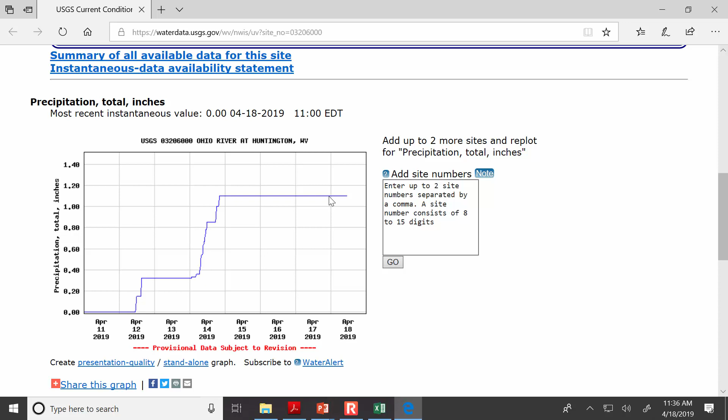The river depth here is regulated by a series of locks and dams on the Ohio River. It would be very unusual in an unregulated stream to have periods where there's just a totally flat horizontal line like this. But it's possible in Huntington at the Ohio River that the water depth could stay the same.

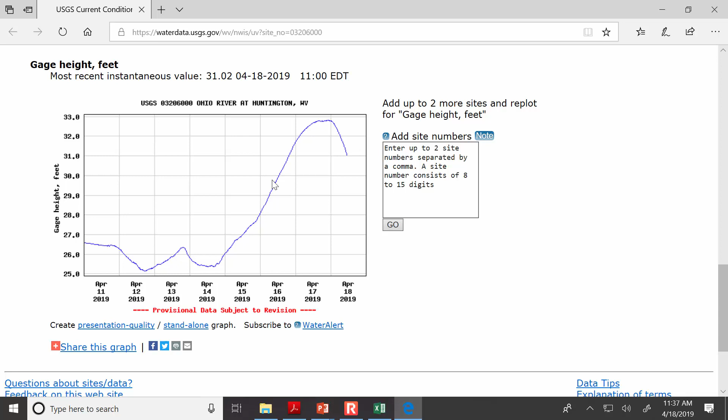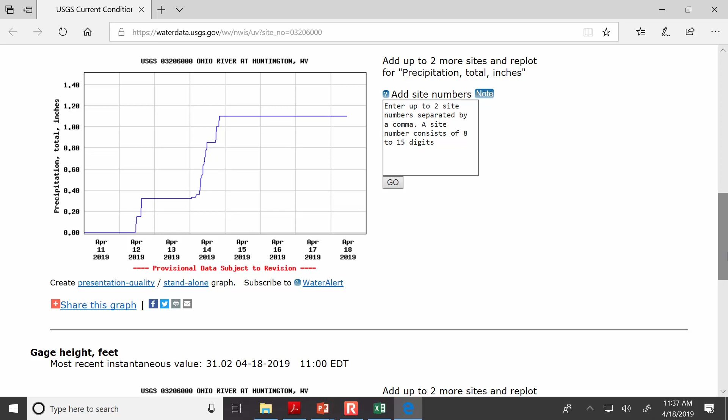Oh, this is precipitation - what am I talking about? Here's the depth. It is still a regulated stream, and you'll see times where the pool doesn't seem to be changing very much. But if we look at the relationship between when it's rained - here would be precipitation total over the past week - it rained on the 14th. So if we go back here and look, the depth on the 14th was 26, and then the depth increased. So as you might guess, there's a relationship between when it rains and when the river depth increases.

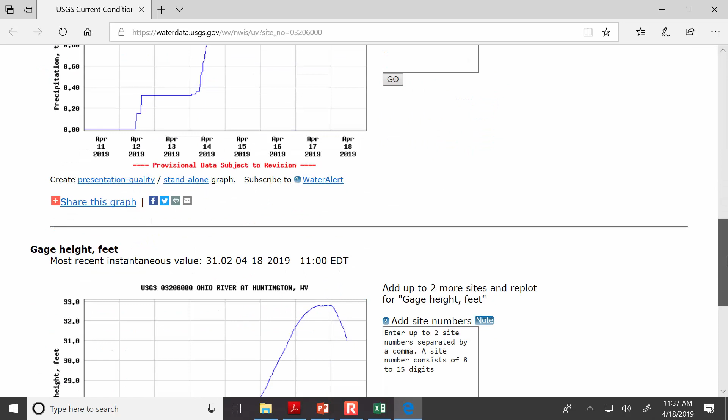If you think about how important water is in West Virginia and the number of stream crossings where there's a road going across a creek with a culvert underneath or a bridge, there are literally tens of thousands of spots in the state where there's a bridge or culvert, but yet there's only 100 stations where they're directly gauging the stream depth.

I mention that because it illustrates the need for some method to extrapolate from a measured depth to what the depth will be upstream or downstream of the spot where you're actually measuring. For instance, if we're measuring the Ohio River at Huntington, what does that say about the river depth at Green Bottom? We don't have a gauge there, but you can estimate the depth upstream using methods incorporated into HEC-RAS, a program developed by the Army Corps of Engineers.

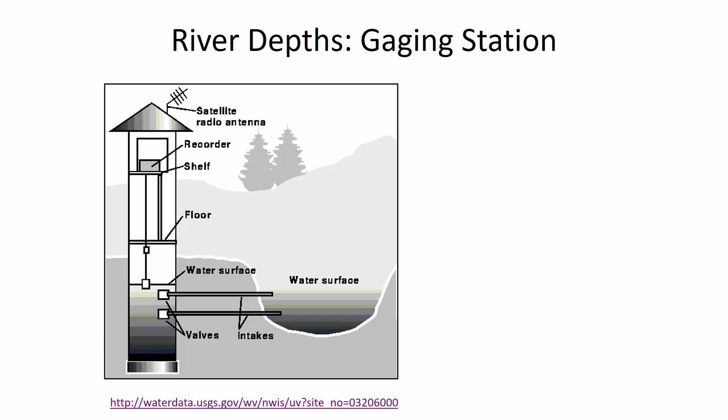What we're going to learn today and on Tuesday is the method working behind the scenes in these hydraulic calculators. You'll learn how to do the calculations manually by hand on the spreadsheet, because you should never really start using and trusting a design program until you have a firm grasp on what math it's doing, what the limitations are when it doesn't apply, or what assumptions it's making.

The direct step method, in some texts also known as the step-by-step method, answers the question: if you have two depths, how far apart are they? It's used in cases of non-uniform flow, and remember there's a variety of features that can cause non-uniform flow. If water is approaching a drop-off, then there's a curved surface of the water.

In the recorded lecture you watched for Tuesday, you learned how to find the slope at just a single point, the slope of the water surface. But what's a little tricky is you can't use that water surface slope to find the depth upstream and downstream directly, because the slope is changing.

We can say the rate of change at a single location, but the problem is if you move upstream, you're going to have a different slope. So we have to have some method that accounts for not only the changing depth but the changing slope as well. This direct step method is used in non-uniform flow where you have steady conditions, meaning you assume the flow rate is constant over time, but non-uniform means it's changing with respect to position because of a hydraulic feature like a change in slope, a spillway, a gate, or flow over an edge.

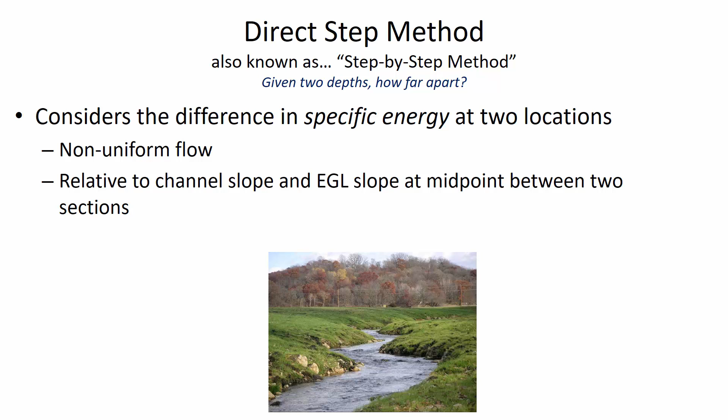The calculations we'll do look at the midpoint between two sections. So we'll divide a curve up into pieces, and then we're going to basically numerically integrate based on what's happening at the midpoint between two pieces.

The direct step method, here's a summary. This water surface cross-section shows y1 as the upstream depth and y2 as the downstream depth. Because you have non-uniform flow, the slope of the energy grade line, labeled TEL for total energy line, isn't necessarily the same as the water surface slope, and that's not necessarily the same as the channel slope. So those three aren't parallel like they would be in uniform flow when we use Manning's equation.

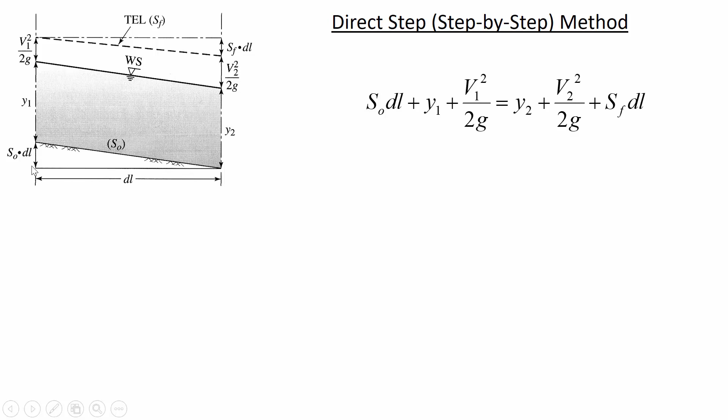Here is what we are adding up: all of the components of energy. On the left side, S naught times dl is how far above some datum the channel is—that's the slope of the riverbed bottom, S naught, times dl, the distance between the downstream and upstream sections. These two sections are a certain distance apart, the channel is sloped, so Z1 is going to be higher than Z2. That's the first element of height at location 1, then there's the depth Y1, and then we've got the velocity head. Those are the three terms that account for energy at location 1.

As the water flows downstream, look at the slight subtle differences on the right side. At location 2, we measure the elevation relative to that location, so the datum is at the bottom of the channel. Now we don't have any term related to the slope or how far upstream—we're just measuring the energy and depth starting at location 2. So the terms are the water flow depth, the velocity head, and the energy loss.

So S sub F, remember the slope of the energy grade line is related to the resistance that the water encounters as it's flowing downstream. And if we have uniform flow, if Manning's equation applies, then S naught times dl would be equal to S sub F dl. So in uniform flow, if they were parallel, the delta Z is the same as the H sub F. But that's not the case here because we don't have uniform flow, since the depths are different, Y1 and Y2. So this energy loss isn't the same thing as the delta Z.

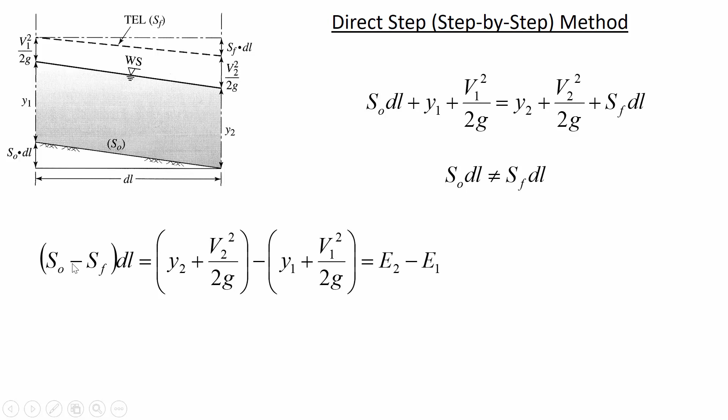Now, what we're going to be doing is taking a look at the characteristics of what's happening in the middle between the two points. Because remember, the whole issue here, we're trying to predict how much deeper or shallower the depth is upstream. We'll have some point where the depth is known, and then we're going to try and find out what is the depth somewhere else. So we're starting with a location where we know the depth, and trying to see how much deeper or shallower it is somewhere else.

So what we're going to do is divide it up into lots of little pieces, and we're going to ask ourselves, how curved is the water shape between those two points? We're going to analyze the curvature of the water shape, and that will tell us the distance in that segment.

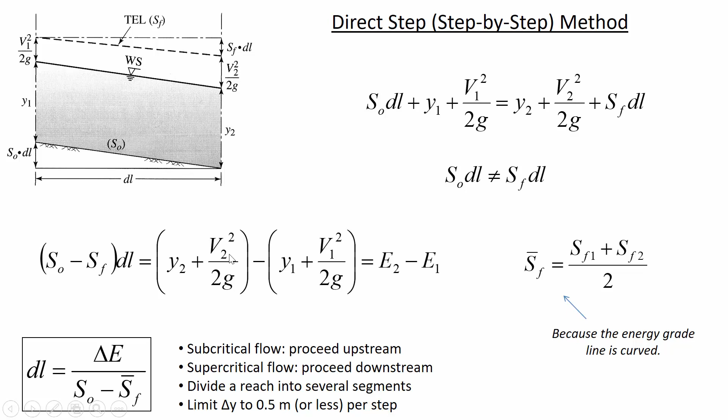So the dl, the distance between the two points, is related to how much energy loss there is relative to the difference in slopes between the channel slope and the average slope of the water, the energy grade line. This bar here, S bar, just means consider the energy grade line at the upstream and downstream location and average them together.

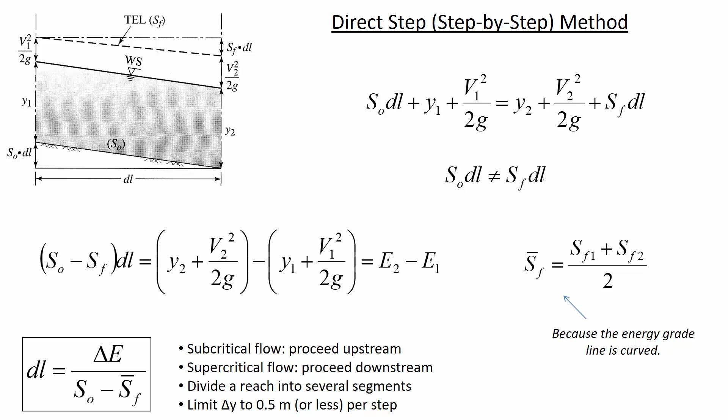This method seems pretty abstract until you actually have to apply it, and I think one of the best ways for me to systematize a process and a series of equations like this is to come up with a spreadsheet example that illustrates it. So that's what we're going to do today, and if you have your computer with you, you're welcome to start up Excel and follow along. If you don't, that's fine. This will be recorded, and you can watch and absorb, then work through the example later. Either one will be fine.

So while your computer's booting up, let's take a look at what's happening here. Why is there gradually varying flow? We have water flowing downstream, and originally it was flowing at the normal depth. So way upstream here, we could have found the depth upstream because we know the N value, we know the width of the channel, we know the channel slope, the flow rate. So all of the things that we need to use Manning's equation are provided. And we could find, if we go far, far away from this disturbance, what's the uniform flow depth. But as the water gets closer and closer to this obstruction, why is the water getting deeper? Why does the water pool upstream of an obstruction?

Very good, exactly right. It pools because it's gathering enough energy to get over the obstacle. So upstream, it wasn't yet affected by that obstacle, so it was just flowing at its normal depth, the normal depth being where there's equilibrium between energy loss and the downstream slope. So in the normal depth region, the flow depth is just governed by the slope of the energy grade line being equal to the channel slope. But then we get into this section where it's under the influence of the obstruction, so what we're able to measure is the depth immediately upstream of this broad-crested weir.

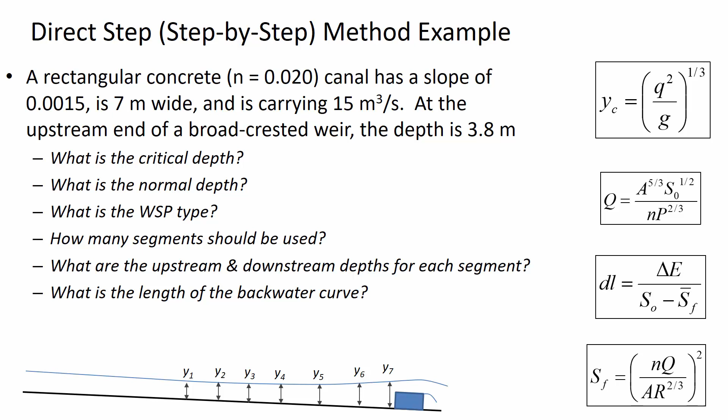These first two parameters we have to calculate are critical and normal depth. If the normal depth is greater than the critical depth, that means it's mild, so normally you'd have subcritical flow. But if the normal depth is less than the critical depth, that tells you you have a steep slope and conditions are going to be supercritical. We'll do this preliminary work on the whiteboard and take a look at whether conditions are supercritical or subcritical.

And just for the people following along at home, I will pull up the same thing on the screen.

We could really use another whiteboard in this classroom. You wouldn't believe how big the whiteboards were when we used the engineering lab building next door. Oh, they were vast. The good old days.

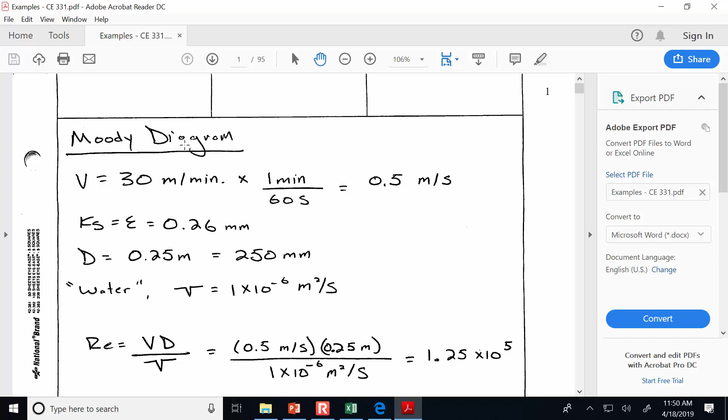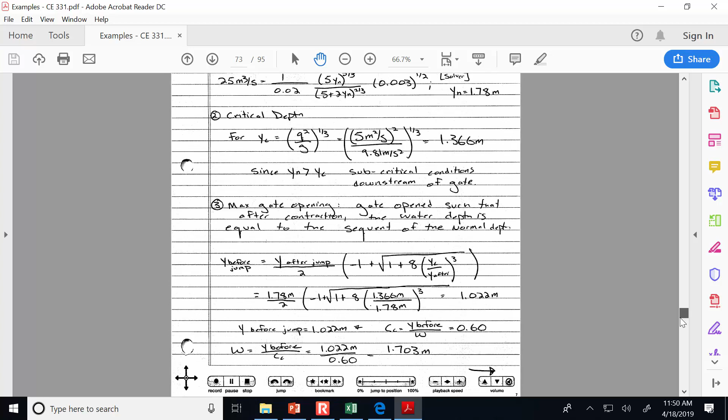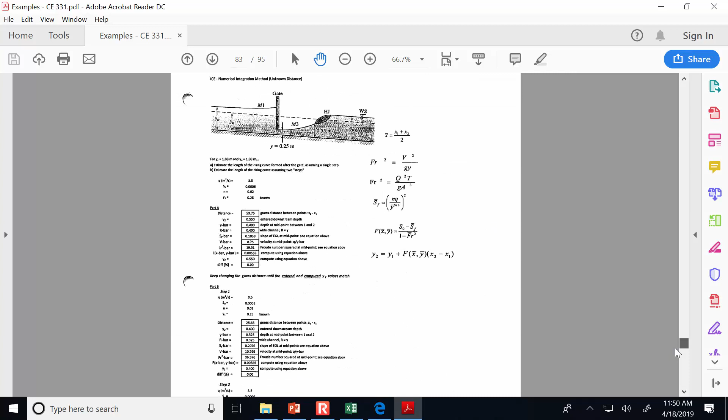All right, so we know that Q, the flow rate, is 15 cubic meters per second. Manning's roughness is 0.020. The channel slope is 0.0015. The width of the channel is 7 meters. And we've got some location where we've measured the depth is 3.8 meters.

I'm going to call that Y7, just because in the figure we suggested we're going to divide this curve up into 7 pieces. We'll talk more about why that is in just a minute. But that's at the upstream end of the choke.

Okay, so let's find the critical depth, Y sub c. It's flow per unit width, lowercase q squared, divided by g, to the 1/3 power. So if we have 15 cubic meters per second divided by a 7 meter wide channel, square that, divided by 9.81 meters per second squared, to the 1/3 power, our critical depth should be 0.7764 meters.

And the normal depth, which we need to know in order to diagnose the flow regime, we're solving Q equals A to the 5/3 power, slope to the 1/2, divided by n times P to the 2/3 power. This is a flow rate of 15 cubic meters per second. Our cross-sectional area is 7 times whatever the depth is, y sub n, 7 being the width of the channel, so that's to the 5/3 power. This is rectangular, so we've got it easy for now.

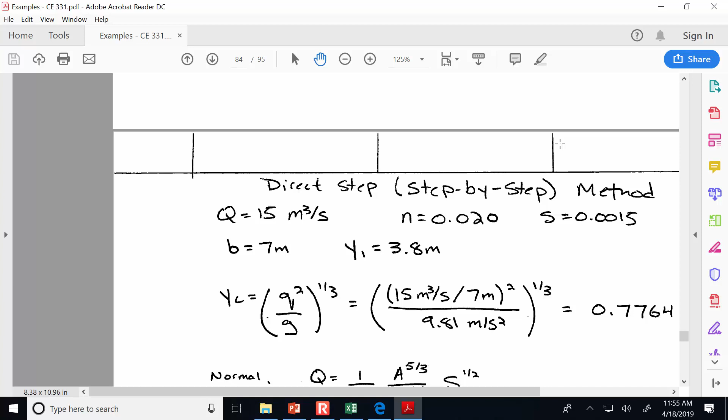So those are the preliminaries that we need to take a look at. Any questions so far on how we began with classifying the water surface profile?

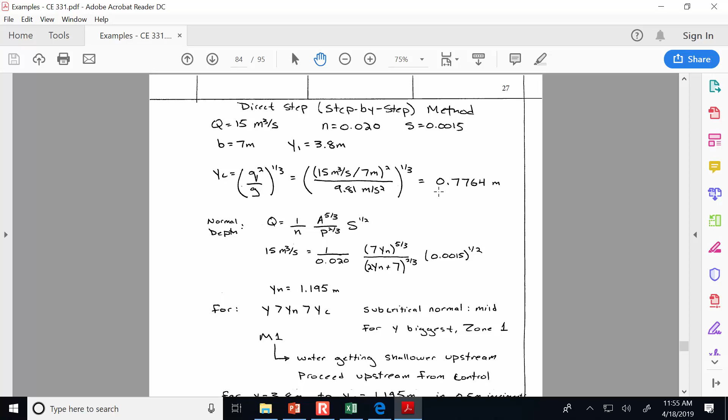A rule of thumb is that when applying this method, you shouldn't do it in steps greater than 1/2 meter in elevation difference. So we're working from this location immediately upstream of the choke, where the depth is 3.8, and going down to approach the normal depth, which is 1.195 meters. So the elevation difference is 3.8 minus 1.195 — that's how much the water is changing in depth.

So 3.8 meters in depth is the starting point, finishing at 1.195 meters. That's the delta in depth. And our limit is 0.5 meters per step.

If you have bigger differences than that, then you're trying to connect the dots with a sloped line when really it's curved. The more pieces we divide this up into, the better our accuracy will be. But then it also increases the computational complexity and the amount of time it takes us to solve it.

So what that suggests is if we just use half meter steps, then we should have 5.21 steps. We want to round that up, so we're going to use 6 steps.

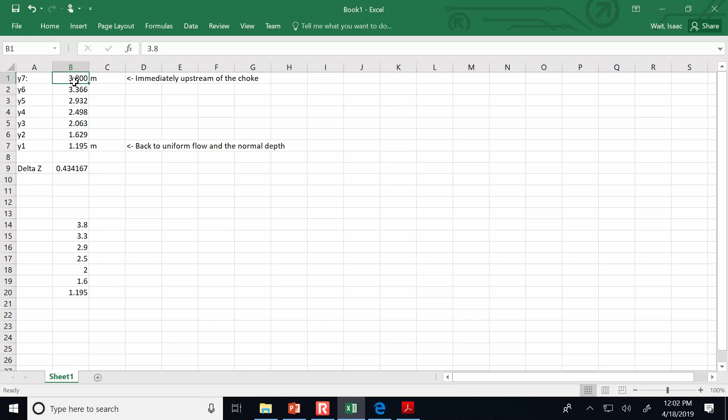We're just trying to evenly spread out the points. So, I mean, we could have done that same method by just saying 3.8, 3.3, 2.9, 2.5, 2.0, 1.6, and 1.195. I mean, it would be about the same answer in the end. We're just being a little bit more precise in picking the depths at the locations we're interested in.

All right, so create a new sheet. These were just kind of like the preliminary calculations. And I'm going to paste, so we've got access to these two formulas. I'm going to paste it so that we can see it as we're working. Let's put in the B, so that's the channel width, is 7 meters. In the problem statement it says the flow rate Q, make that a little bit larger.

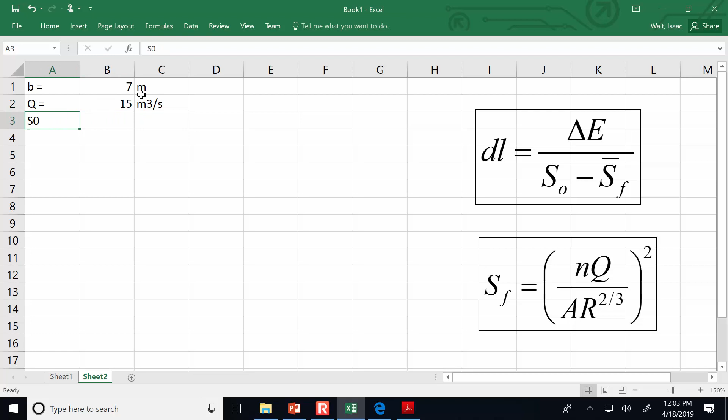All right, Q is 15 cubic meters per second. The slope of the channel, so that's how steep the actual river itself is, 0.0015 meters of elevation per meter of horizontal. And then the Manning's roughness of the material is 0.02.

All right, so set up the following column headers. We're going to have some depth, and we're going to have the cross-sectional area that's associated with that depth. Then we're going to calculate, if it is that depth, what velocity do you have at that location? And for that location where there's some depth, some velocity, then how much energy is there at that location? We're going to have a delta E term, hydraulic radius term, slope of the energy grade line.

I need to move things over a little. We'll have the average slope of the energy grade line, and then finally the S naught minus the average of the S sub F, and then the length for that segment, so then the DL in terms of meters.

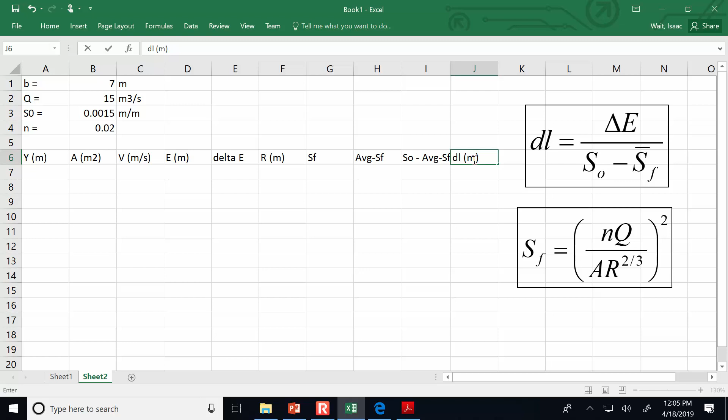Okay, so we've got the column set up, but let's just remind ourselves what we're doing here. We're taking a look at how much energy is there on the upstream location, the downstream location, and then we're using this formula to calculate how far apart are the two sections based on the energy difference between the two, and then the difference of the channel slope and the slope of the energy grade line. So this is the main tool that we're going to use to calculate the segment distances. All right, so our known depths were, again, 3.8.

Let me just actually copy and paste this over. So I'm going to copy, Control-C, and then I'm going to paste the numbers rather than pasting the equations. So paste values, that liberates me from whether the references are right. And I have to spread them out a little bit. So I need to have a gap space in between, as you'll see why. I want to have a gap row between each of the depths.

Well, that's a small little narrow place to grab. There we go. This is not a high precision mouse. All right, so these are the depths.

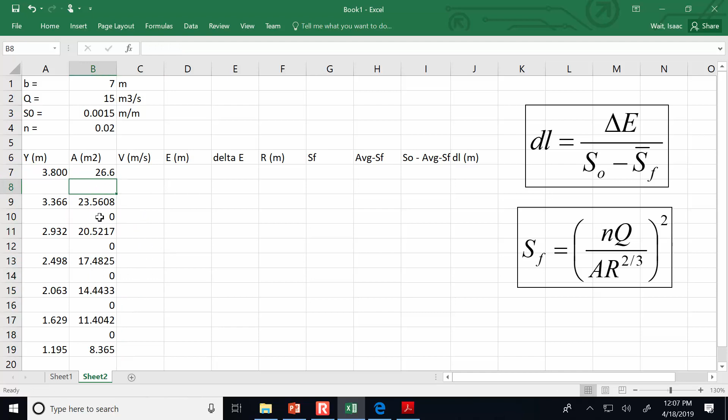Now, how do we calculate the area for this depth? Well, the channel is 7 meters wide, and it's a rectangular channel. So area is just the width of the channel, I'll anchor that reference, times the depth. So if we've got a depth of 3.8, then the cross-sectional area at that location is 26.6. And then I can apply that formula all the way down for the other depths as well. Let me get rid of all these locations where the answer is 0. And then just to clear the clutter, reduce the number of significant digits that are displayed.

All right, what about V? Well, if we know the flow rate, Q, and we know A, then we can calculate V at each of these locations. So V is Q divided by A. Okay, so we've got a velocity at each location. I just am reducing the amount of precision. So we drag that down through all of them. I'll delete all of the nonsensical divided by 0 warnings. Okay. Any questions so far on what we're doing?

So how much energy is there at the location where the depth is 3.8? Well, the energy is in two places. It's in the depth, y, and the velocity head. So plus v squared divided by 2 divided by g, 9.81. So that's how much energy there is when the depth is 3.8. The water's moving pretty slow, so there's not much velocity head. I can distribute that all the way down and get rid of these intermediate spots. I guess I could do that at the end, but I don't want to.

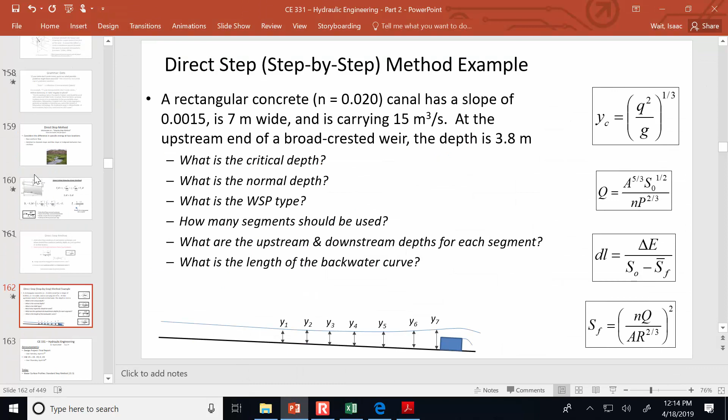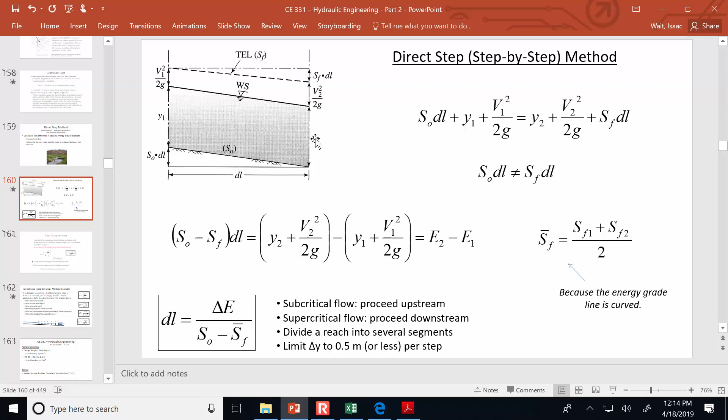Now this average is asking what's the average slope of the energy grade line between the sections - at the midpoint, what's the slope of the energy grade line? Remember, what is the energy grade line? Going back to this original sketch, it's the dashed line above the water surface by the distance of the velocity head. So we've got an upstream and downstream location, and we want to know the slope in the middle, because that's what we use to calculate the new depth.

And so the average is just going to be this one and that one, divided by 2. So that's the slope of the energy grade line at the middle between two locations.